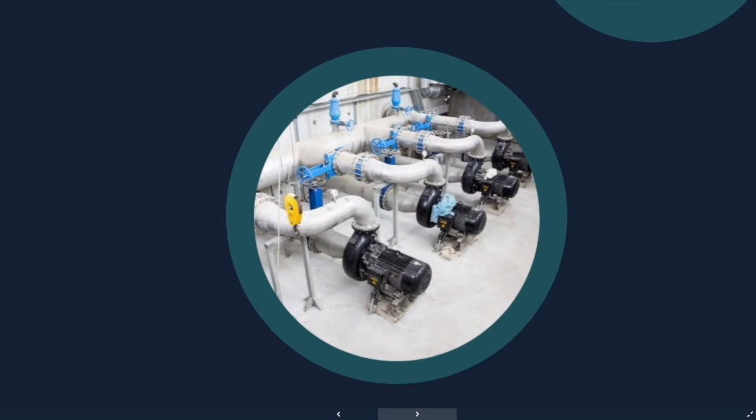What many don't realize, however, is that the pump is not designed to operate at a range, but at one specific point of pressure and flow called the best efficient point. At this point, radial forces are minimized, and flow is the smoothest. Pump performance quickly deteriorates as the pump moves away from its best efficient point.

To overcome this problem, manufacturers build pumps that are incredibly strong. These pumps are so durable that if they could operate at their best efficient point all the time, they might never break down. Unfortunately, most pumps will rarely operate at their best efficient point. To understand why, we need to talk about pump performance curves.

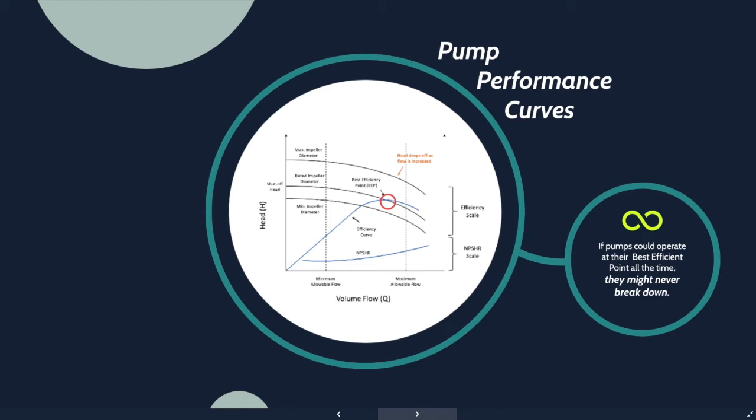These specifications, which are provided by manufacturers, include the pressure and efficiency curves, which intersect at the best efficient point. The problem is that these curves are a moving target. Although they may look pretty straightforward, that changes as soon as the speed of the pump changes. While the flow change caused by speed is linear, the pressure change is exponential. With the curve's two variables changing according to different rules, tracking the curves becomes a serious math challenge.

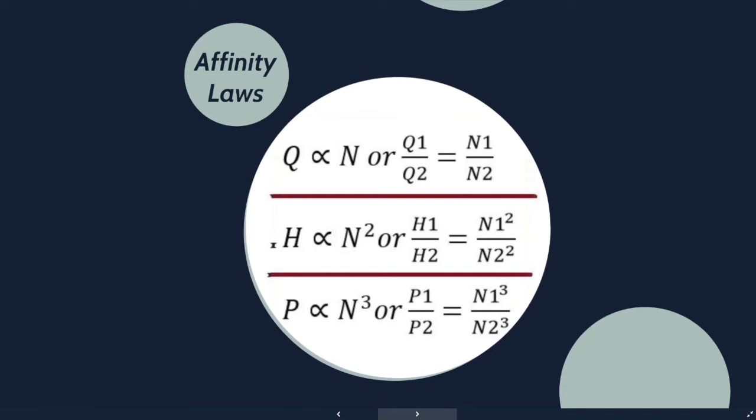On top of that, pump curves change over time due to wear in ways that can't be predicted and will be unique to each pump, even within the same system. That makes the manufacturer's curves unusable. With no way of knowing where the actual pump curve or best efficient point are at any given time, it's no surprise that most pumps only ever hit their best efficient point by accident.

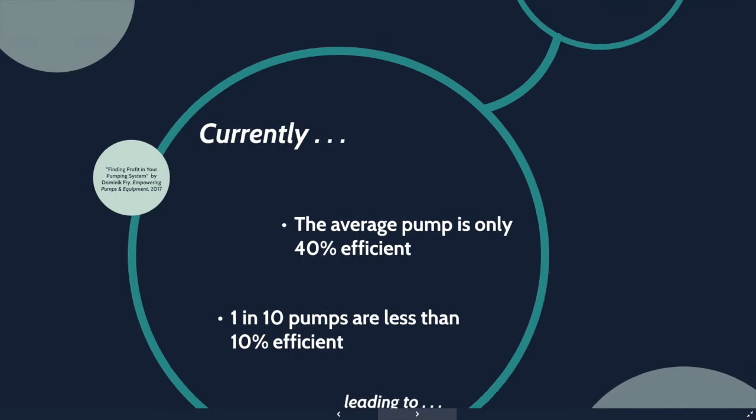In fact, the average pump operates at an appalling 40% efficiency, with 1 in 10 pumps operating below 10% efficiency. Operating at these levels causes excessive wear and damage to the pump, resulting in more frequent repeat and random failures.

Pump failure can be predicted by the reliability curve, which shows the relationship between pump failure and operating away from the best efficient point. The best efficient point is at the top of this curve. Unlike the even slope of the efficiency curve, the reliability curve is a sharp peak. While you lose efficiency at a consistent rate when operation moves away from the best efficient point, the reliability drops off quickly and dramatically.

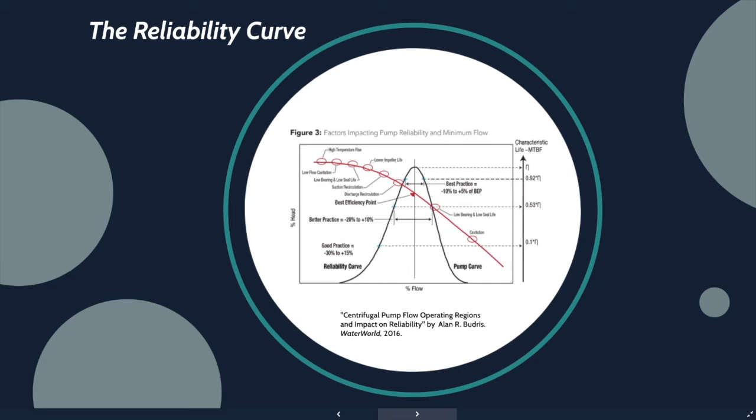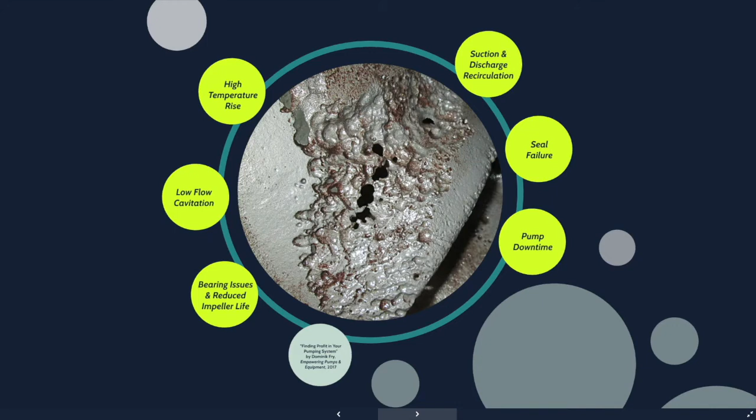When pumps run 20% to the left or 10% to the right of the best efficient point, they experience rising temperatures, low flow cavitation, bearing issues, and reduced impeller life, as well as suction and discharge recirculation, which can lead to seal failure and pump downtime. These huge costs of operating away from the best efficient point are universally accepted as an inevitable sacrifice to fulfill that top priority: meeting demand.

By combining all of the information on pump performance that we just covered with live process data and even more math, BCI Analyst makes it possible to apply the reliability curve and best efficient point to daily operations so you can finally meet demand while increasing efficiency and decreasing failures. By analyzing process data like speed, flow, pressure, and energy, BCI Analyst is able to generate pump performance, efficiency, and reliability curves for every pump, not based on manufacturer specifications, but on real live input from your pumps.

With that data, we can track changing curves over time to monitor the reliability, flow loss, and efficiency, not just of the whole system, but of each individual pump as it wears. With that information, in real time, we determine the most efficient, reliable, and therefore cost-effective way to operate, and then either send it to operators as recommendations or automatically make adjustments.

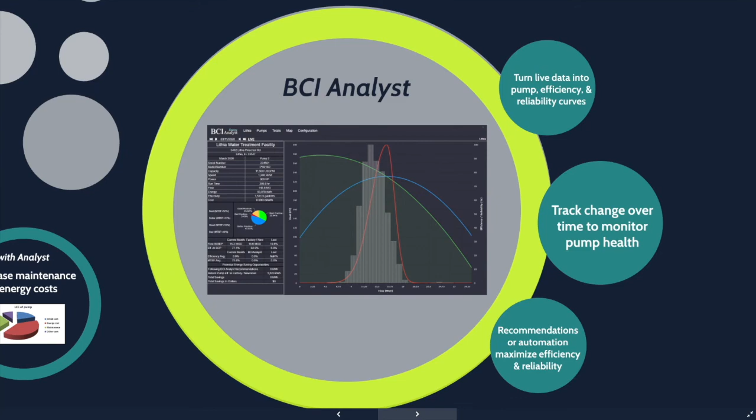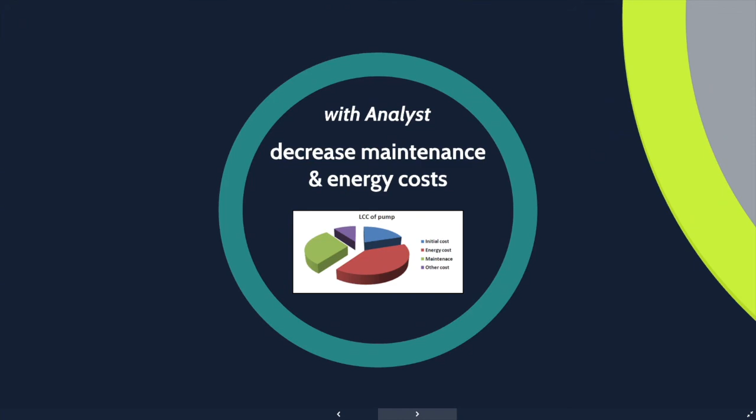BCI Analyst enables you to take chunks out of both of the biggest contributors to life cycle cost: increasing reliability decreases maintenance costs, while higher pump efficiency decreases energy costs. And, best of all, Analyst does all the math.